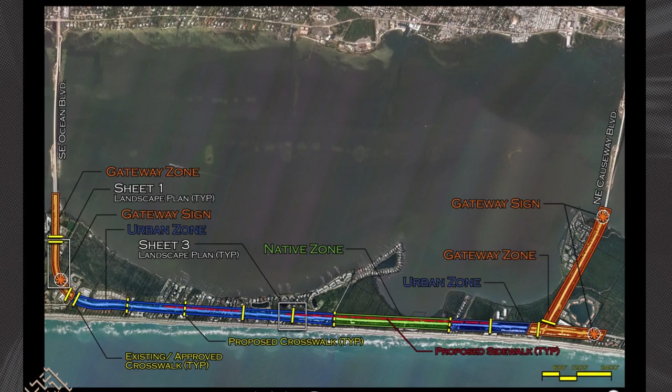The blue area, which is predominantly the balance, is really the urban area, the areas that have been built up - the condominiums, the single-family homes. We're going to talk about the hotel site. These are urban, more developed areas of the corridor. That's going to have a different, distinct look when we landscape, when we deal with that area.

The green area, the last area, which is the smallest area on the site, is really the area that's been left alone and preserved. It's a naturalized, kind of native area. There's no development there, it's pretty left intact. The landscape has been left intact, and it probably will continue to look like that for some time. So the analysis of the corridor showed us these 3 distinct areas.

We had to do this predominantly, or partly, for our own design intent, but also for the Florida Department of Transportation. We're working with them, and we want to tell them what we want to do with the corridor, where we want pedestrian crossings, where we want to add sidewalks or landscape. They need this analytical work before we can get anything achieved. So part of this document was created for the permitting process with Florida Department of Transportation.

So the analysis was done. We have 3 distinct areas, and we have a budget to work with. We only have so much money, we can't do the whole project. There's not enough money in the county or in the coalition funds to do the whole project, so we had to decide what would be the first phase, what we would do first with the limited funds that we have.

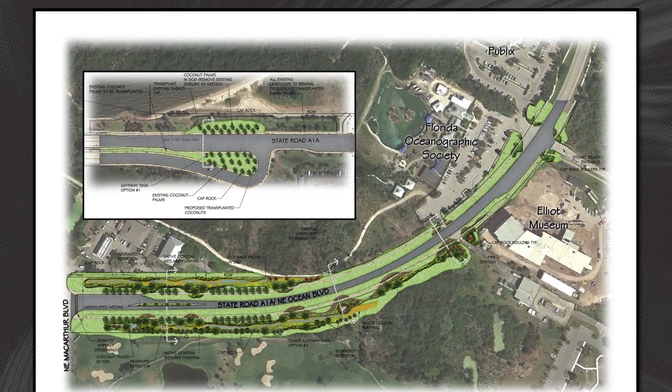A lot of people talk about the ficus trees on Old St. Lucie Boulevard, or they talk about oak trees on certain roadways. They define the roadway, they define the access point, and they also define the community. So we wanted to define the roadway with a bosque, or a row, I should say, of palms, an alley of palm trees.

I think you go to the next sketch. Yeah, it's not much better, but right along the perimeter, we wanted to bring in a definitive edge so you knew where the road began and ended, where the sidewalk would be on the opposing side, and these trees would give shade to that. So we saw a row of coconut palms lining the roadway in this area.

This brownish squiggly line behind the coconut palms are those wetlands. We saw coming in there and regrading those wetlands. Typically there's going to be water in them. We would put coastal plants in there and native plants. I'm going to show you an idea of how that's going to look in a minute, but it would be cleaned up - the duckweed would be gone. We try to get the water to move, and we try to make that more of an enhancement than an eyesore.

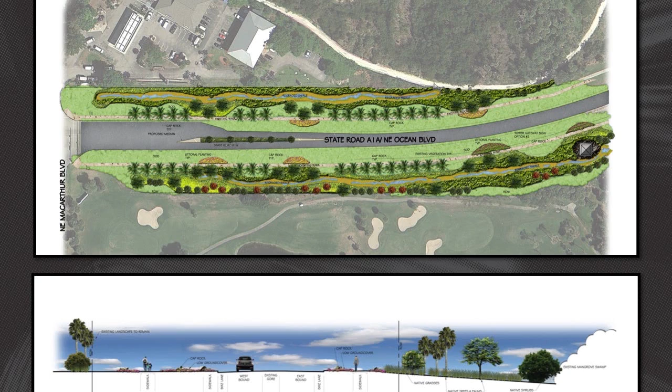We saw adding medians wherever we could, and that's not everywhere, but wherever we could. Predominantly those occur at the intersections and maybe a couple hundred feet beyond the intersections. And that will help reduce the width of the right-of-way and help confine it, not physically, but visually confine it, so it doesn't feel such a broad expanse going across.

It also helps start screening some of the buildings. You have some unsightly signage and buildings, and it helps soften the impact of the buildings. We can't hide them - people need to make a living - but we can soften the impact of buildings by adding this landscape, so you have a layering of landscape.

Within the right-of-way, you're going to have some shrub mass and turf. Outside of the right-of-way along the sidewalks, palms. And then beyond that, fixing the swales and the drainage in these wetlands and cleaning that up.

These sections will show you better as you walk around. You'll look at these sections that we provided. It gives you a clearer picture of what we're planning on doing there. This lower picture in the lower right-hand corner shows what we've done.

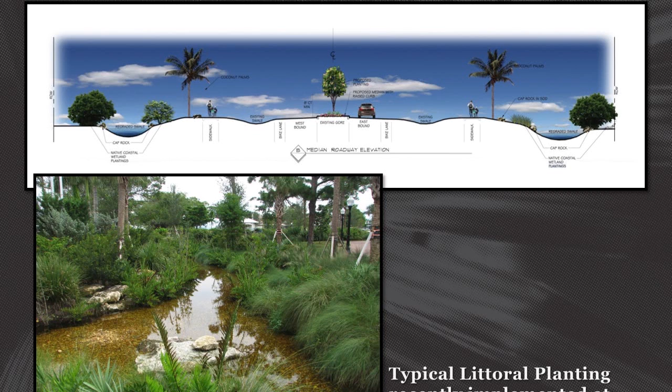I don't know if anyone has been to Memorial Park recently, but we redeveloped it. One of the problems they had was drainage, and this is something we did there where we created a bioswale. It's an environmentally sensitive swale that when water flows through it, there's a stone base, a light rock base, and a lot of indigenous plant materials that take up the water and look good there versus looking like weeds.

That's what we're proposing along the swale area. If you could highlight the swale, yeah. Those swale areas would look like those bioswales. We'd like to move them around a little bit, and add potentially some Florida cap rock to add some interest, to make those a better statement than they are now.

This section above also shows the coconut palms on either side again, and in the medians we would have small trees, small flowering trees wherever possible, to try to add some color and interest to the landscape.

Let's go to the next one, Jane. Some people were asking, can we improve the intersections of the roadways? Yes, if the budget allows, there are ways to do that. You've seen that in other new communities where they've come in and put either pavers or concrete stamped the intersections. That's a possibility - this was just one idea.

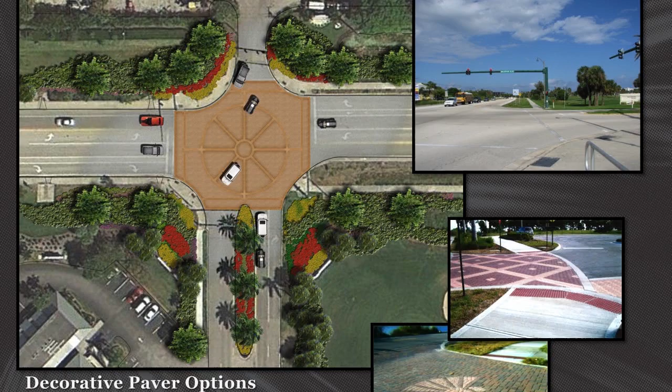The closer you are to the ocean, the more intense it is. But we're trying to focus on salt-tolerant, low-maintenance, indigenous species that would take less water, less infestation of bugs and other insects, and try to work with a plant palette that will look good all year round versus having to be maintained heavily.

As we proceeded with landscape, somebody brought up sign programming, and we started thinking about what we could do with a sign. Again, conceptually we haven't spent a lot of time on this, and one of the tables here is going to ask for your input on signage, names, logos and branding of the community. So the coalition asked us what we thought.

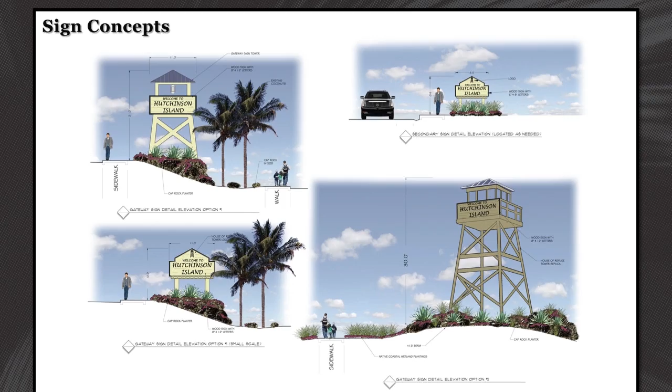What we did focus on was something a little bit larger, something like the House of Refuge observation tower. We thought most communities, especially historic communities, try to use a part of their history to explain who they are. They do it in their sign programming, or in other ways, but the only real piece of history we have out here is this observation tower at the building here that I'm showing.

So the sign program, we started thinking, should be large because of the distances when you're driving down A1A - the long sight distances and the width of the road - we wanted to create something fairly large. The coalition was asking maybe we could do something with waterfalls, or maybe with rock, and we thought that's very high maintenance, very difficult to work with those elements. So we wanted to work with a structure, with the observation platform here.

Let's go to the next one. It's at the House of Refuge.

These were a couple ideas, four ideas of potential signs.

This is the one you just saw, the one that shows the observation tower, and potentially putting a sign incorporating with it. It's the size of a two-story building. It's not a small sign. It would be set off the road and would be seen from quite a distance.

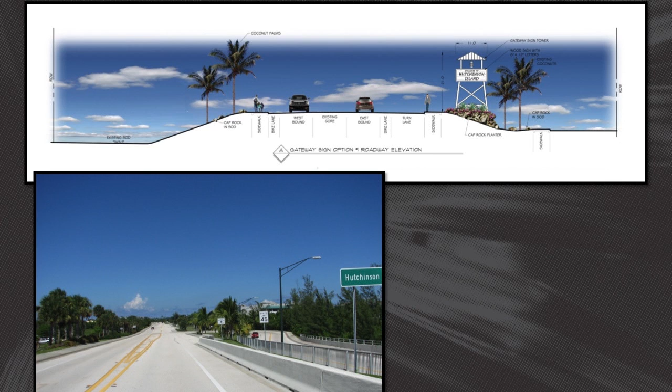The other sign in the upper left-hand corner shows kind of a replica of that, but a smaller scale sign that might be used closer to the road by the touchdown areas. And then there were a few other sign ideas that kind of got away from the House of Refuge look.

Okay, the A1A roundabout - this is at Jensen Beach, the Jensen Beach roundabout, and here's how the roundabout is being utilized. He's created this new design for the roundabout.

And we've also, from a minor standpoint, landscaped the roundabout, adding landscape elements to the roundabout and to the median, etc.

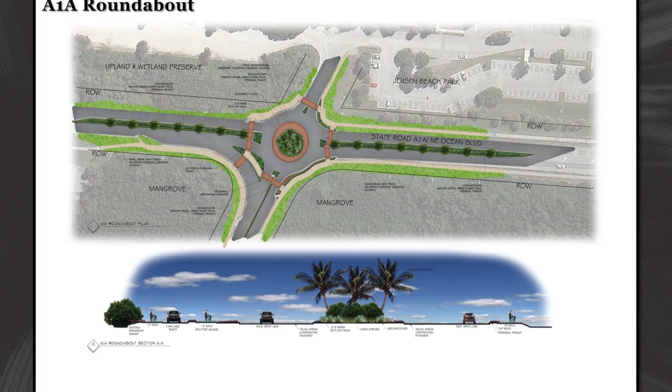But before I get into that, you can see in this graphic the roundabout has these brown lines going through it, and those are pedestrian movement - all these brown areas show pedestrian movement to get from one side of the roundabout to another, which can be confusing at times with roundabouts.

He also looked at adding a stacking lane on the north side of the roundabout. This is just so you understand the roundabout - this is A1A going north-south, and we're at the Jensen Beach Causeway in the Jensen Beach area.

But he added a turning movement and a stacking lane so that more cars would actually hold up in this area and travel through this lane. That's my understanding - I'm explaining his design.

And by doing that, it frees up the movement going around the roundabout heading south.

He also looked at - I know there's some ideas floating around where we would add the same kind of turning movement at the roundabout on the west side of the roundabout. But when he looked at that, he felt that would create more accidents than it would be helpful.

In other words, if people had to stack when coming onto the island, waiting to get into traffic, they'd have to look behind them to get into traffic. You'd be looking over your left shoulder to make this movement because you have to get beyond this point, and you'd be looking back to the north to access the roadway.

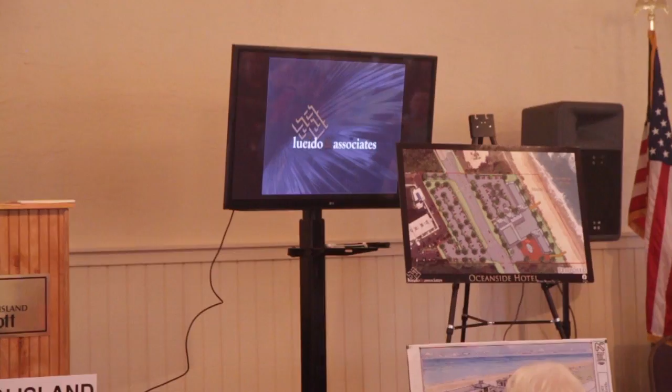They are going through the permitting process. They have the first step of the permitting process complete. They're going to finalize the permitting - it'll probably be in the fall of this year. It takes almost nine months to finalize the permit, so my assumption at this point is that they'll start construction late this year, early next year.

And they're going to renovate the building, add parking, pool area, and on the opposite side of the street they're adding overflow parking as well. They're going to have underground parking at the hotel as well, subsurface parking to add parking to both sides of the site.

They also are speaking of - as we've been talking about pedestrian crossings - they realize the need, and the coalition has been asking about doing a pedestrian crossing study, which we're in the midst of. But one of the crossings will occur at the hotel because of the parking on the opposite side, as well as the condominiums nearby that would like to utilize the hotel or the restaurant. So there'll be a crossing.

We're trying to add medians. Wherever we have a crossing, we try to put people into a safe area. In the middle of the road there's a median, which would be landscaped and serve as a crossing safety area. I think that's all I have, Jim.